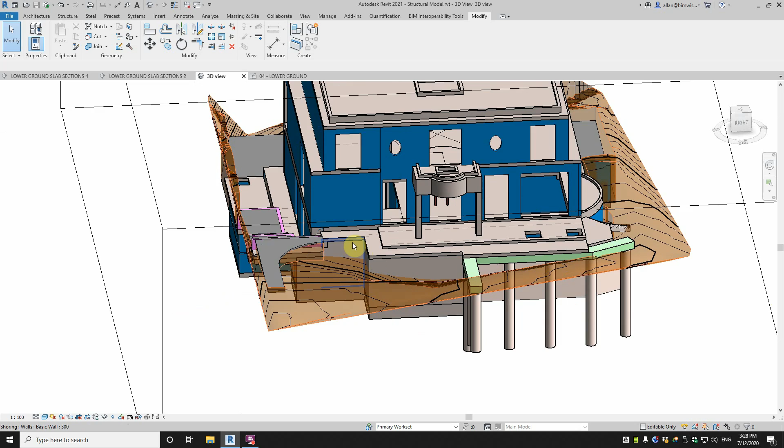We have this house model here in Revit, and it has these dirty, great big retaining walls at the front of the property. You can see there's some shoring closer to the boundary, but we have these great big concrete walls with big footings here to put the lower basement and the subfloor in, with underground parking in there with a lift, a car lift.

So how can we detail those retaining walls? Let's switch over to the lower ground floor plan, which shows the outline of the footing. You can see here that we have this great big thick concrete retaining wall, 300 thick, and a big footing. Then there's another slab sitting on top of that, which is the basement boundary, or the lower ground floor boundary.

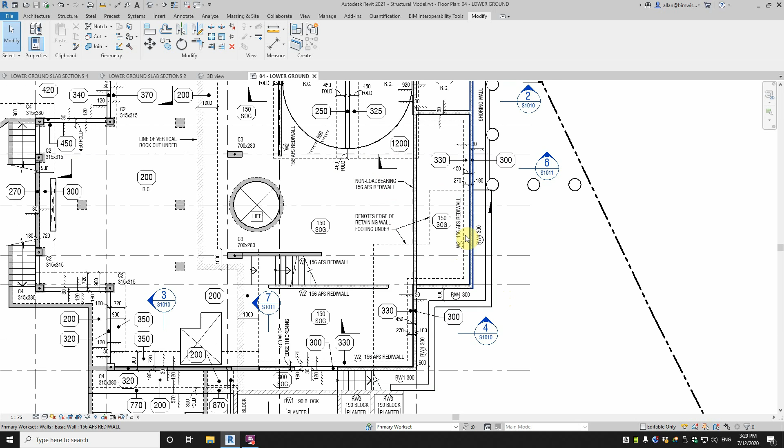And then the gap in between is a 600 wide zone, which is a plenum for mechanical ventilation of the air in the parking area, which is this zone here. It's a parking area, and that's a turntable for the cars to turn around and then go up a lift, and they can go out the ground floor on a lift.

So let's have a look at this. I've got this section here, so you cut a section, and typically something might look like that. It's modeled fairly accurately. You've got the footing, you've got the key of the footing there, you've got the concrete retaining wall.

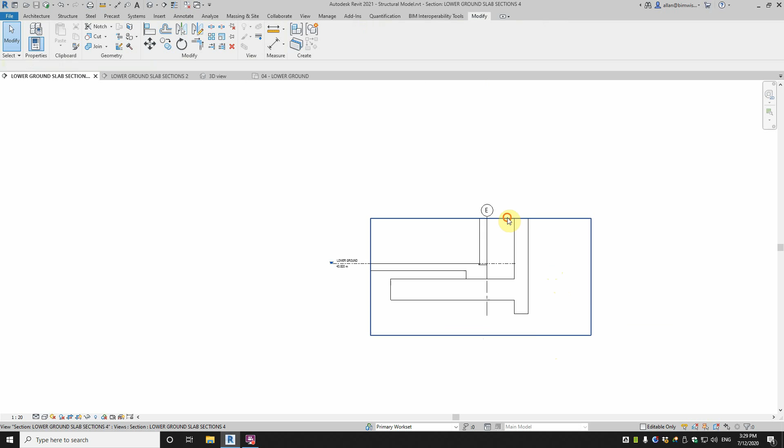If I pull it up a bit and see the next level, you can see that this wall here is actually a 156 AFS Rediwall, which is a plastic wall basically, but you pour concrete inside it with some reinforcing. Let's just switch that over to shaded.

You can see things clearer like that. You can see, well, there's the plenum, there's the lower ground, and there's a slab on top of that, so there'll be some grade placed over that footing.

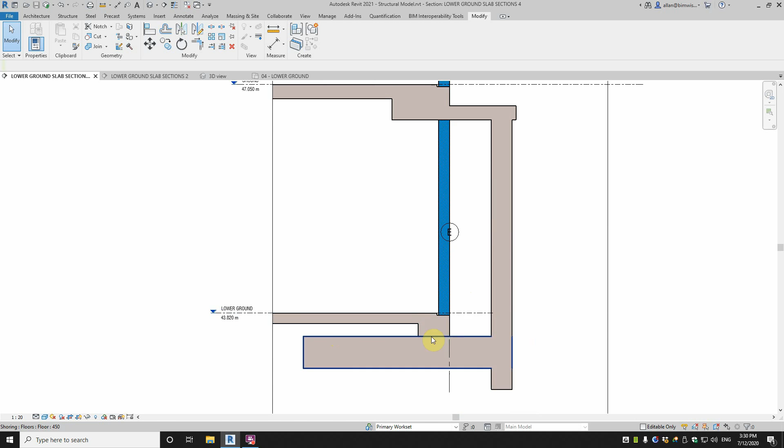So let's detail up the base of this. Let's pull it back to how I was going to detail it on this sheet, which is just on the bottom part. First of all, we'll probably do some dimensions. Dimensions make things more sensible.

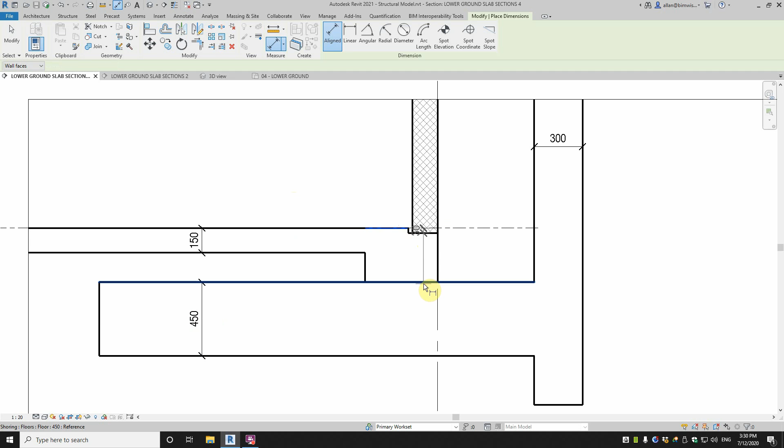300 there, 150 there, 450 there, we'll dimension this up. You can grab that little dot there, and you see how you can pull it out like that. By default it's got that little arc, which is okay, but you could tick the leader off and just have it in like that. And that's okay too. You can also grab dimensions and pull that line if you want it a bit closer. Dimensioning's okay in Revit.

I much prefer AutoCAD. I think there's more control for the draftsperson in there, you can just be more accurate with your dimensioning and your snaps. So we'll line those up. We'll give an overall one here too, and an overall one there.

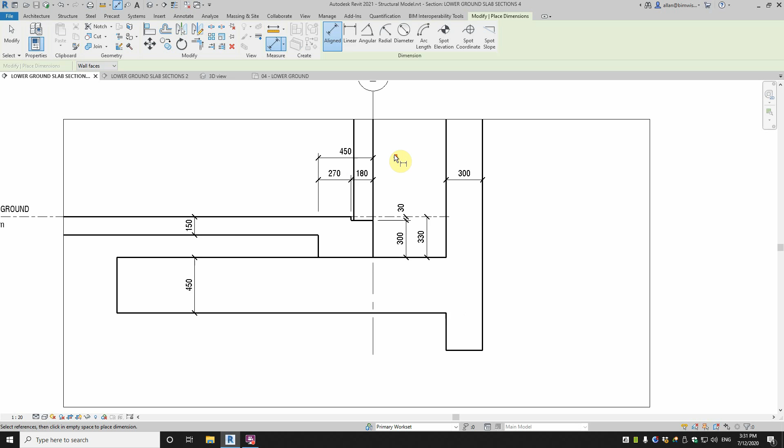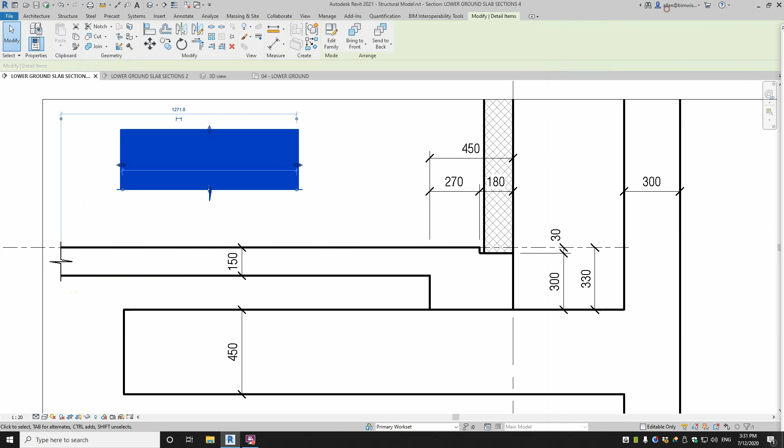Now the other one I want is break lines. So I have a family that I've created down in families, detail families, called detail break line 1 to 20, which is my scale 1 to 20. It's just basically 2 lines, so you click and you click, and it has the line work in the middle at the end of a break line, and it has a masking region there.

Now you can turn that off and on. There's a few things you can turn off and on there, like turn off the masking region. For example, if I turn it off on this one, blank area off, you can see the line work is still there. If I turn it back on, that line work's gone.

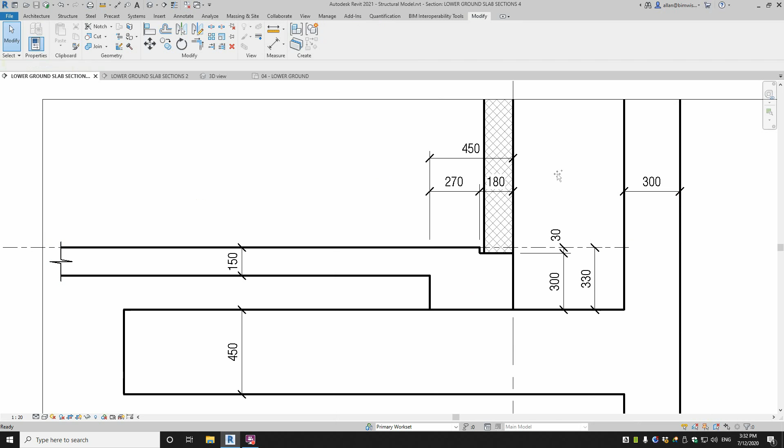So let's just break lines across all of these. We're only going to detail up to there. Also need dimensions, just that. I always use the align dimension.

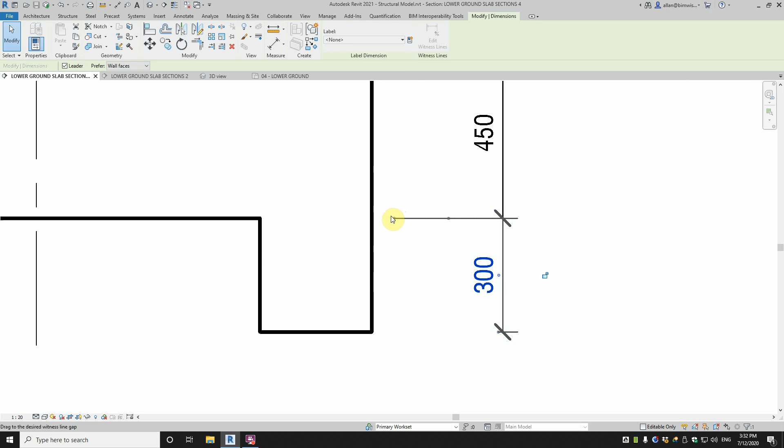See that? The depth of that footing would be better out there. This is what I don't particularly like with the Revit dimensions - it's can't really get it accurate. It's a lot of eyeballing stuff in some areas, which I don't like, particularly as I'm an old school drafter, and we just did everything precision.

300, that little key there, 450 thick. We will give an overall dimension - that's a good thing to have. Quite a decent size footing - so 3 meters by 300 millimeters, or 3 meters by 450 millimeters deep. So it's a decent retaining wall, over 3 meters high.

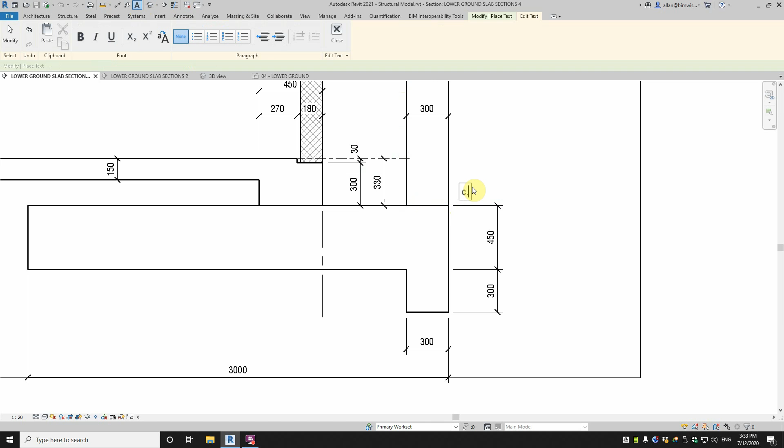I think that works pretty well with Revit. So let's put a tag on that with a bit of text now - CJ, as construction joint, so they know there's a construction joint there.

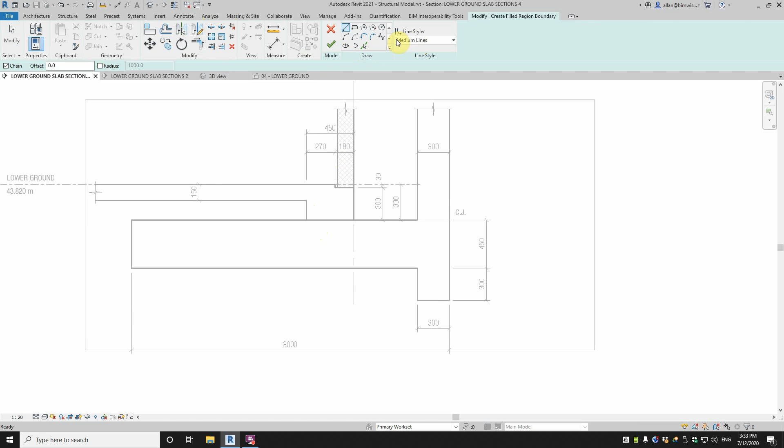Now we want some hatches around there. This is on grade, so there won't be a vertical cut there, but I just want one hidden line shown on the plan. I'm not going to model that slopey bit, but that's more likely. We use the annotate command and region. I'll show you a cool trick here. If I use the medium lines, which is the slab outline, I just draw a line straight up, 45 degrees, and whiz it around like this.

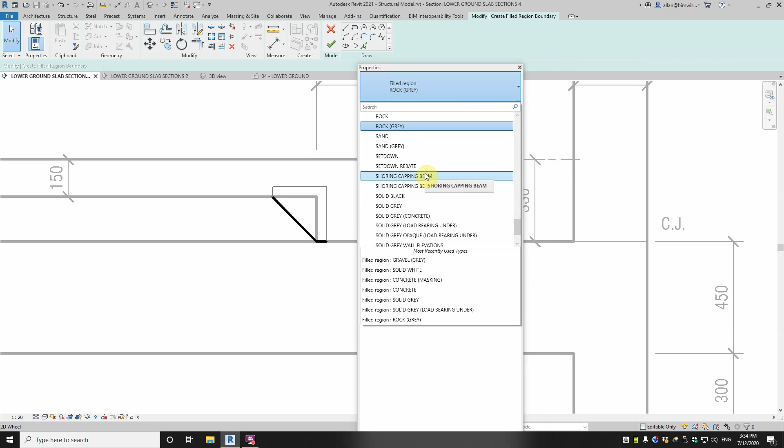Now here's the cunning bit. We make those three lines invisible, and set my fill profile to solid white, which is one I've set previously. If I edit that type, you can see the foreground pattern is white, it's solid, and it's no masking - oh, it is masking, sorry, masking's on. So we'll go okay on that, and it makes that shape there.

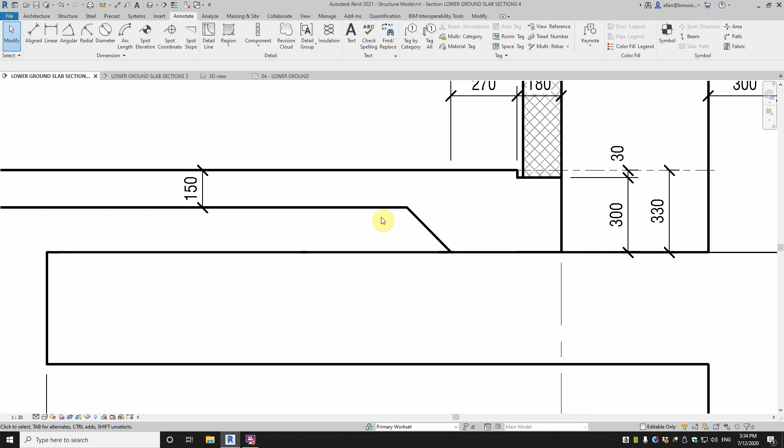That's more likely how the concrete's going to be poured, because the grade put on top of this, the gravel, will just taper off here to that minimum width of 450.

Now let's put the rest of the grade in. Like I said, there'll probably be grade there, and a membrane. So we'll go to hidden lines, and I'll just click there, and click that, and off there's fine. So I'll trim all that up now into a box.

Now I'll make those two invisible, and then I shall trim that, using that fillet command there, and I'll offset that 15 millimeters, but tick the copy off. Those hidden lines are going to represent the waterproof membrane, or the plastic that goes under the concrete slab there. And then underneath that, there'll be some compacted gravel.

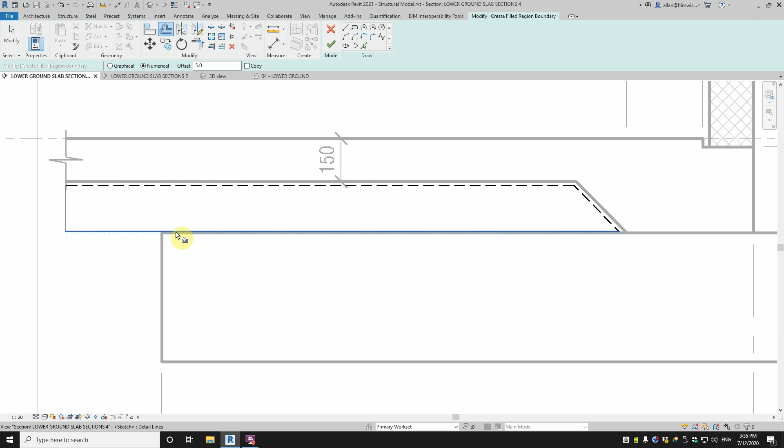Now I'm just going to offset this 5 mils because I don't want that invisible line right on there, but you're not going to see it. And then what I will use is one of my preset gravel ones. Where do I get my hatches from? How do I get those? Well, I get them from AutoCAD, the PAT file. You can import AutoCAD hatches, and then they stay in your model forever.

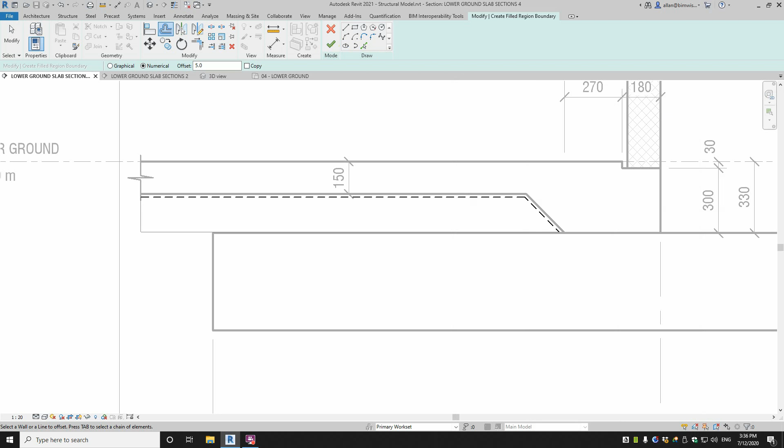So that one's good, I'll just look at that gravel - that was gravel grey, I'll just look at gravel dense. Oh, that's way too dense. So these patterns came straight from AutoCAD into Revit.

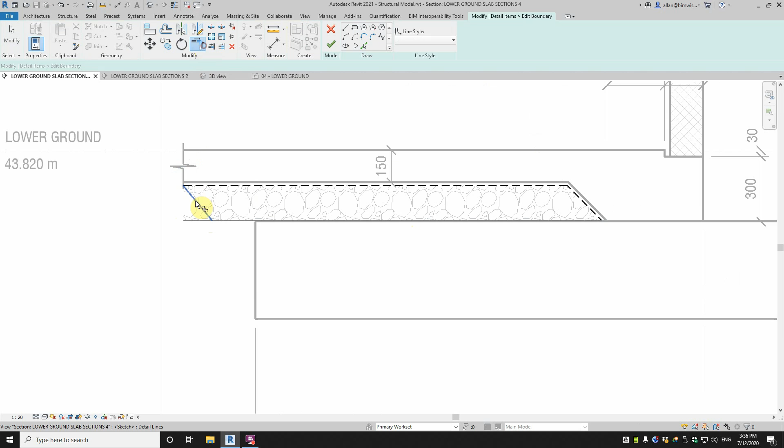That looks pretty good. I might just taper that, give it a bit more funky style - it's a bit diagrammatic anyway. It's probably maybe more like that actually. Might represent it like that.

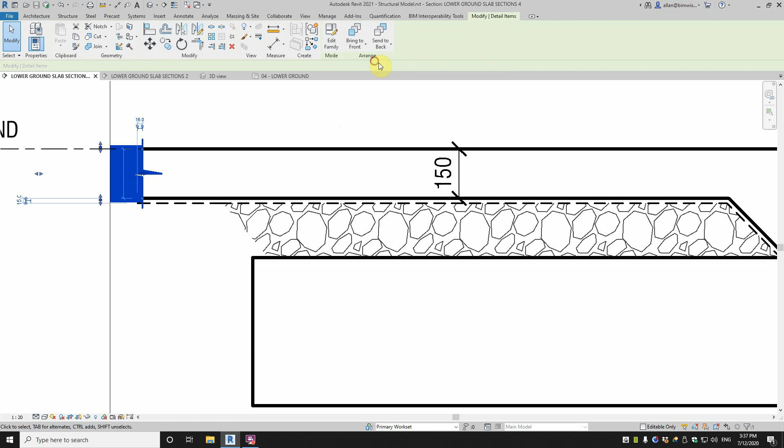If you ever get this situation where you've drawn a line like that and you want to have it masked, just click on that and then the object, and you know there's masking there, and come to this thing here and say bring to front. And that didn't work - bring to front. Maybe I'll just do this one and go send to back. Why isn't that working? Oh, you see why?

The masking isn't quite covering. And I can grab that there and pull it down, and the masking covers it now, but it didn't change the line work. So that's a way of doing that.

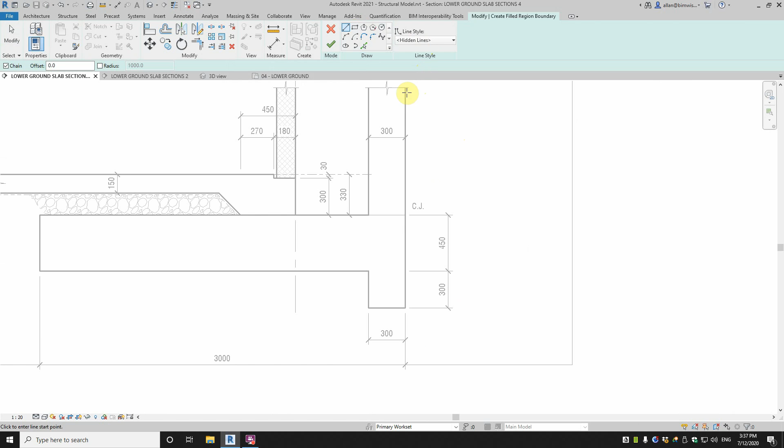Now we will have a membrane down this side too that the architect will specify. So let's do a similar thing here, but this project's in rock, sandstone, really high strength rock, probably 3000 kPa. So it'll be a vertical cut here. A lot of this will probably be just taking hydrostatic pressure more than actual soil loading.

Let's just offset this 15. Oops, I don't like how that works in Revit. This happens a lot. It seems to get stuck there.

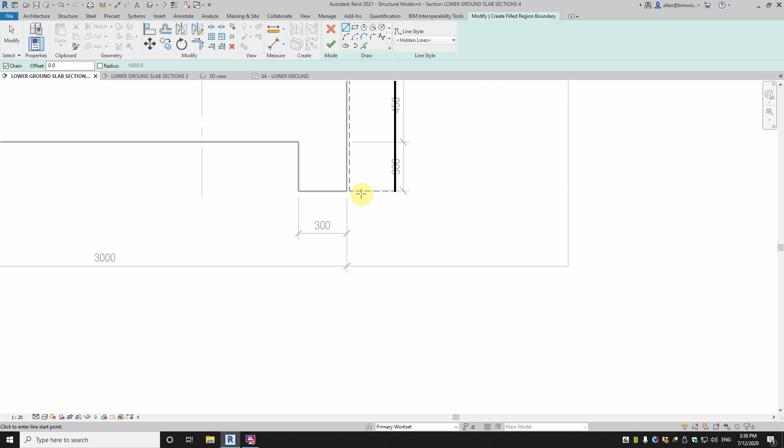Now we'll do a 300 wide gravel, and we'll have a vertical cut up there. Now that line's going to be fairly thick, I'll probably use wide lines on that, make it a bold one because that's the rock cut. And now I'll just put that across, so these bottom two will be invisible lines, and finish on that. And that's the gravel, that's good.

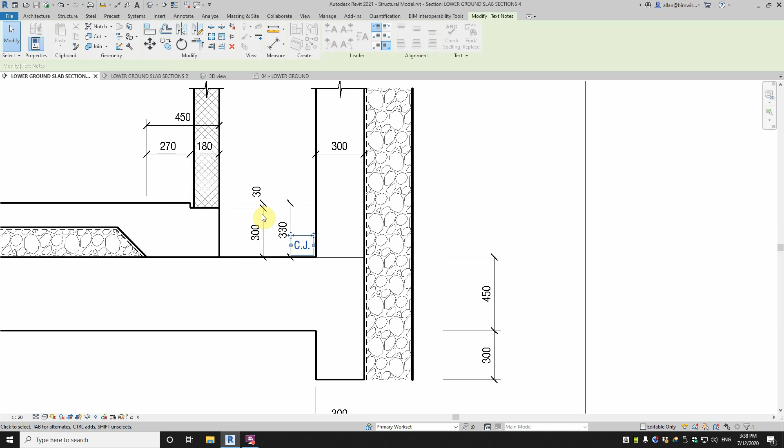You can see that's not super great, so I'm going to pull that dimension out, make it a bit clearer, and probably pull that CJ into there, that text like that. Now we'll have an ag drain down the bottom here - actually, we will make that.

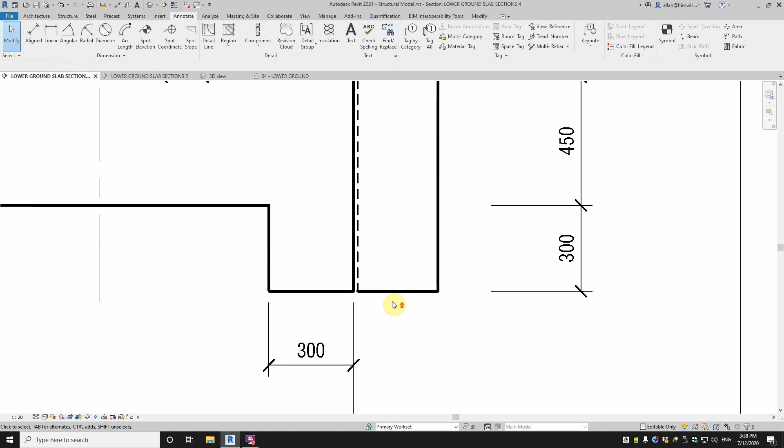I think I'm going to change that to medium lines. Actually, it's getting a bit busy there. So medium lines, tick. Probably should have just drawn a line there. That one's going to be straight across. We'll come back to that. So that's gravel. That's great.

Now we've got an ag drain down the bottom here. The way you can do that is, once again, a filled region with a circle, click the midpoint there, and use 100, so it's a 50mm radius. Make that fairly thick but not too thick, maybe lines, which is my 0.35 pen, and change that to solid white.

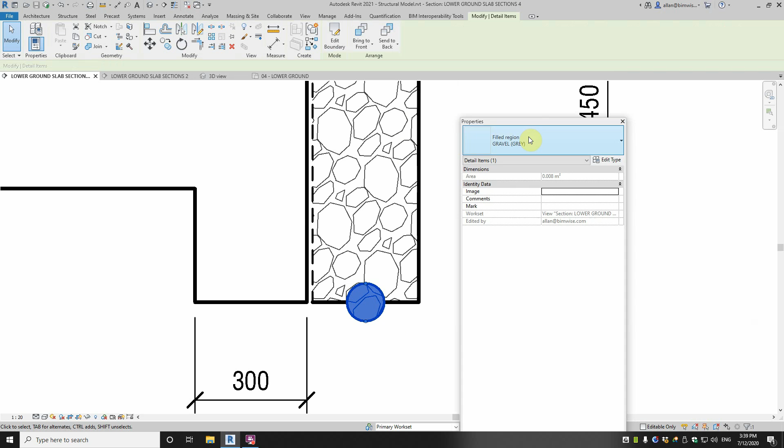And because it's sitting on top, it'll block it out. Now I also like to always show the geofabric around my ag drain, because I like to put them in geofabric socks as well for the civil stuff. So just move that up a bit more probably.

And so we'll draw another circle. DL I typed in then, which was the shortcut for getting to the place detail lines. So we go to the hidden lines, just typed in SC for center, and then pull that out. Now we just want that a bit past it, so 55, that's not enough. 60, that looks like enough white space. So there's my ag drain.

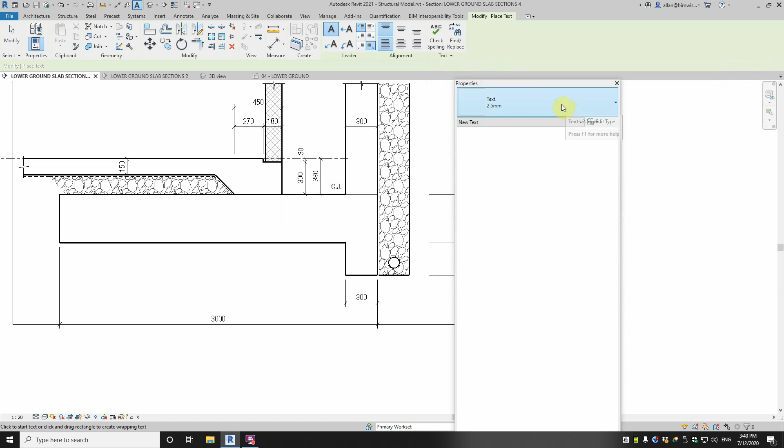I can actually put a piece of text on there. If I go to text, the text button just there, I have preset already, I'm doing 2.5mm high text. And if we look at it, I'm using Swiss 721 Cn BT, which is a great drafting true type font. It's nice and narrow, looks traditional sort of drafting style, but funky as well. So let's go there. I've got A1 title sheet, so I always say do 2.5mm text for A1 plus size. If you're A3 or below, use 2mm text.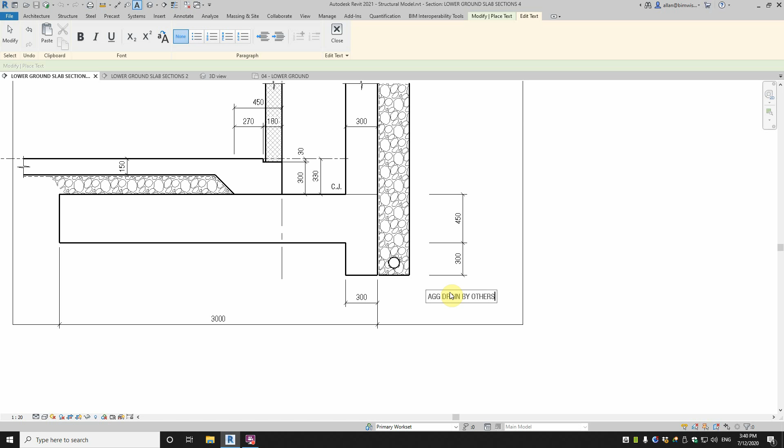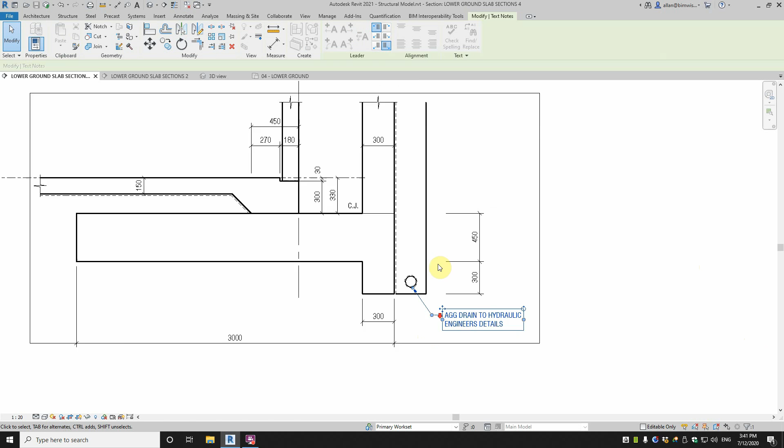So we're going to say here, ag drain by others. Hydraulic engineer will probably be doing the design of that. In fact, I should probably put that ag drain to hydraulic engineers details. But that's important structurally too, because it takes the hydrostatic pressure off the wall as the water can get away and doesn't build up for too long.

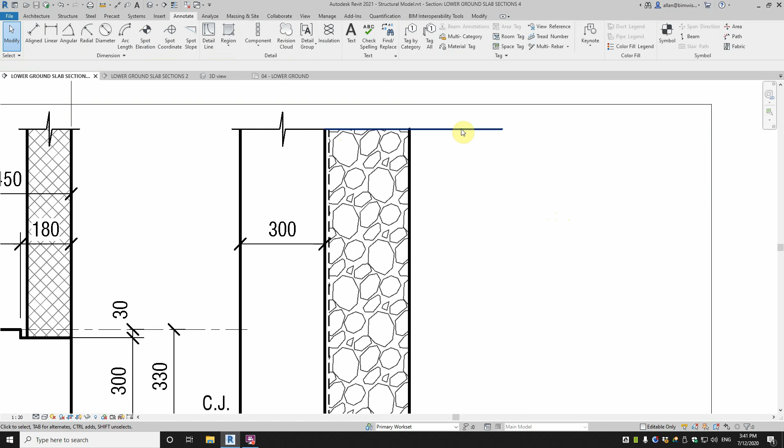Now this one, yeah, I'd rather just keep the break there, so I'm just going to continue a line. I would like that broken further, so just put that as a thin line. Thin lines, thin lines, thin lines, thin lines. That's done. That one. Yep. See, that moves seamlessly through that.

Now, were we going to show some rock here with the rock hatch? So once again, region. I'm going to go rock, rockety, rock, and probably just cut it there somewhere. And we'll drive it around like this. I'll keep consistent with the distance off from each other, and so as it wraps around here, it looks good, drafting style. So let's just trim up our object that we're having as our boundary with the trim command.

Now one thing I'm going to do now is click on the line that I want to move, and then grab this dimension here, this little dot, and pull it to where I want it to offset from, and make that 250. Now if I go to this one and do a similar thing, pull it down to there, and make it 250. Now it's even around. I'm going to pull those dimensions out. Maybe I'll make it 200. Probably still look all right.

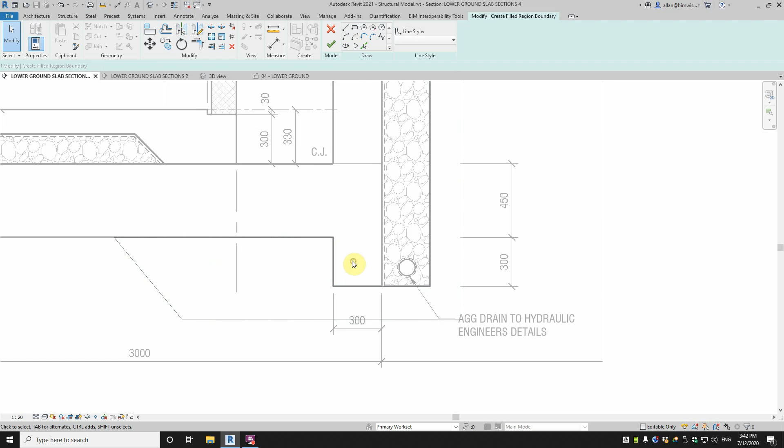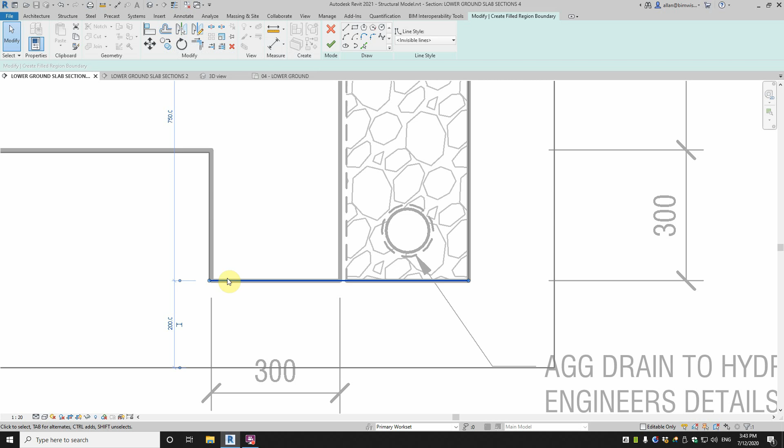Now the other thing I want to do is make all of this invisible lines. I'm going to offset this one by 5mm, so it's not sitting right on there. Sometimes when you've got invisible lines stacked on objects, it can sort of block out that line - whoa, I'm going the opposite way. You don't want that to really happen. I should have, I'll just offset this by 5, to offset by 5.

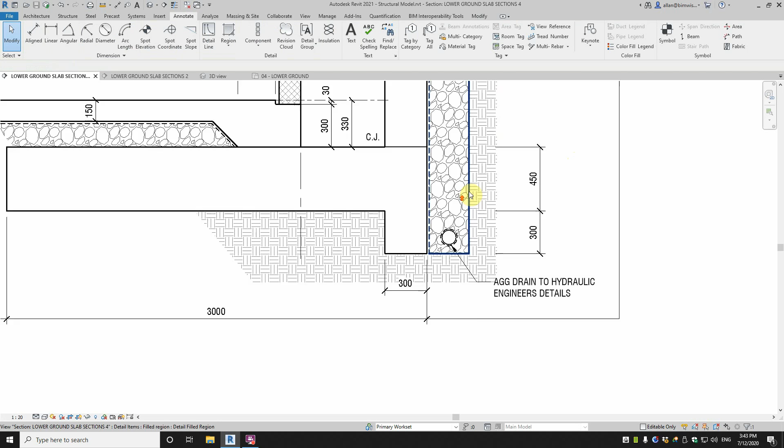And then I'll use my one that I've already done, my Rock Hatch Grey, which I imported from AutoCAD years ago and still works. That's the Rock Hatch, which is the 45 degree straight line, dash line, straight line. That represents rock whenever you see that. As opposed to the Earth one, which looks like that - that's undisturbed Earth, that hatch. When it's at 45 degrees, it's compacted Earth. So let's put that back to rock, grey.

Yeah, I should have done that a different way, but I've got that little line there to fill up, which is a bit dumb. I could have done that in a cleverer way, but that's done. So there's our rock cuts. They excavate this, they put the wall on the gravel, some sort of membrane probably put down here to protect the gravel, protect the wall a bit more from hydrostatic.

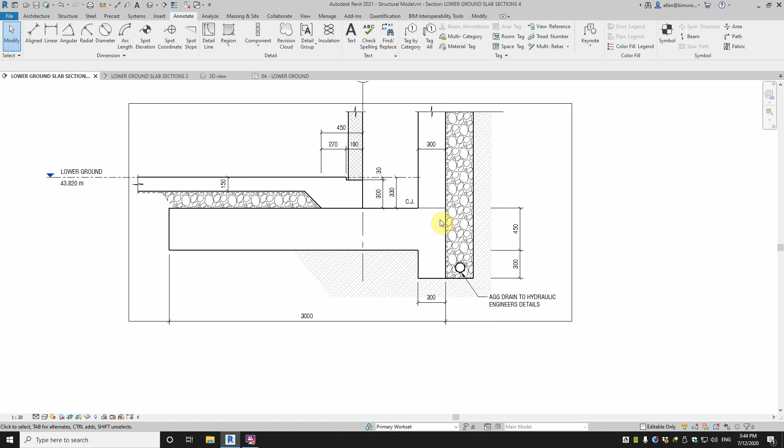Got our construction joint. Now we've got some reinforcing we want to put in, so it's going to be 2 layers of reinforcing coming straight up the wall there.

Now, because it's built from the outside in, you don't have access to both sides because of the gravel here. You probably will see something a bit different here with the way you normally construct walls.

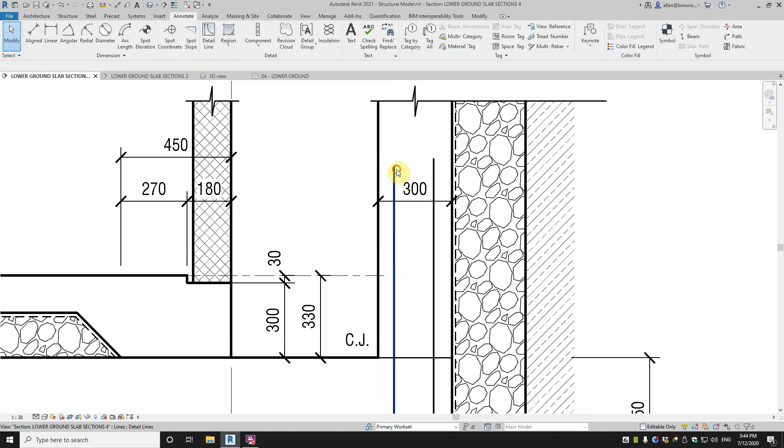So I'll put that on lines, which is my 0.35 pen. I often see this wall, and it depends on your structural engineering here - if it's a cantilevered retaining wall and you haven't backfilled, it's a different load combination. But if it's a pinned at top retaining wall and they don't backfill until the top slab reaches full strength, the loading, tension and compression is all different. So I'm going to assume they'll backfill it before they pour the top slab because of construction access issues. So that will be driving a lot of what I do here.

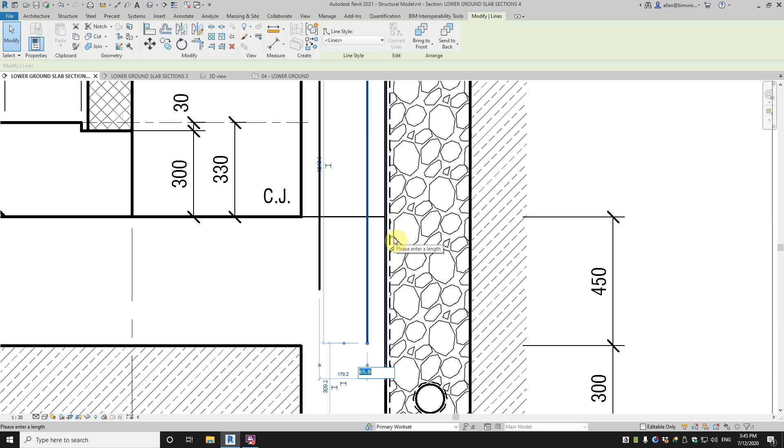So it'll be a 55 millimeter cover or something like that, maybe even 75. I'll just draw it at 65 diagrammatically because that is the center line. Now this one's going to be a bit different though, and you'll see that in a second. So that one I'm going to do as 80.

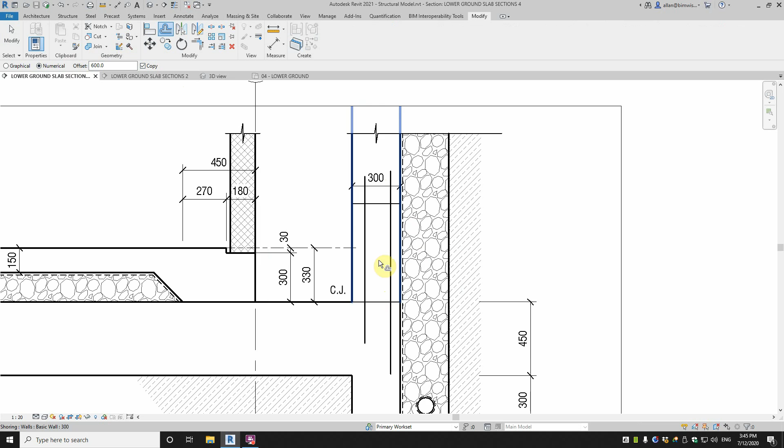Now this, first of all, we need the starter bar. I'm going to use N16s at 150 centers, so a fair few. Diagrammatically, I'm going to show that as a 600 lap, offset that construction line - leave the copy on so you can offset and keep the original. Now I'm going to offset 15 millimeters, this line, and this line. That will represent my starter bars.

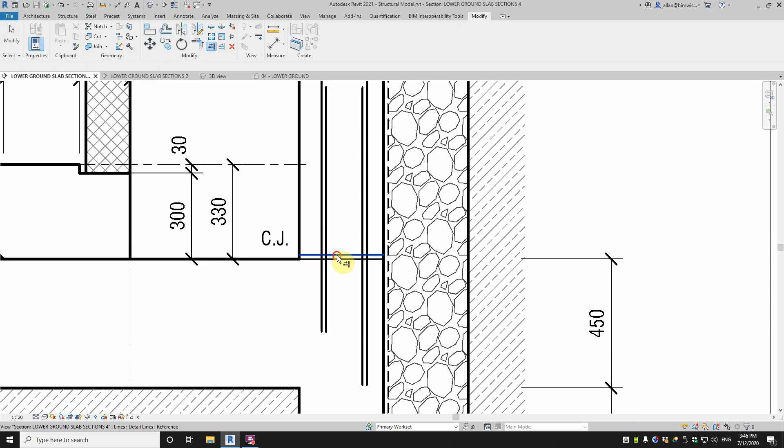So trim to that, trim to that. Well, I'll offset this 15 - 15 is good to use for concrete detailing. If you're consistent, it'll just look good as good drafting if you're consistent there. So let's bang that up there - there's my starter bar.

Whoa, I trimmed the... Oh no, that's right, I've trimmed the wrong ones here. So let's grab the ends of those and pull it up until it snaps to that end of that line. Lines up with it. And then grab that one, pull it up until it snaps to that. So that's right. Now these ones have to come down.

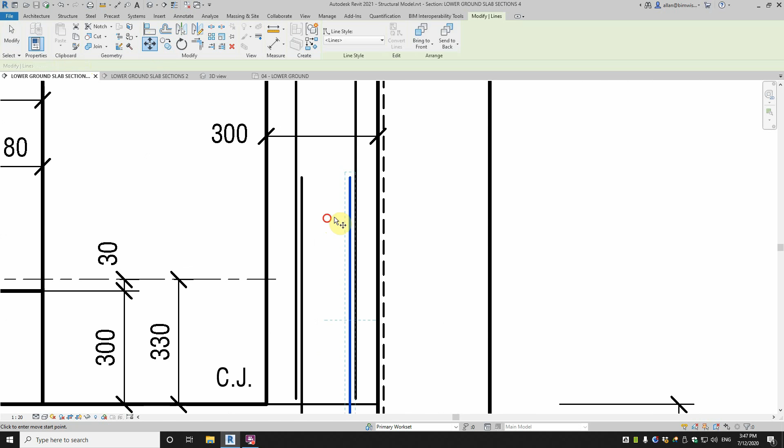Now we've got that. I'm going to pull that out there, tick that leader off because it's getting busy there. Now we've got the bars that are going, the horizontal bars. I'm going to change that to 30 and move that over by 5. This will become apparent in a minute.

So my thinking here is that this vertical bar goes in, and then the horizontal bars are put from the outside in, from this direction in. And likewise for the outside bar, they put it vertical up and then that direction in. So the horizontal bars are on the inside here and the inside here, instead of that side and that side, which is typical for just plain block retaining walls because you access it from both sides.

So let's go to annotate and component, repeating detail component. Now I've got a bunch preset in here, but if I go down to N16, I already have it - N16 at 150. What it's set up to is I've got a family, N16 bars and 20 bars, all the bars in there, and I have maximum spacing at 150. So you click 2 points and it'll fill it out automatically at maximum 150 centers. So just grab down there, grab up there, and it's done.

But then we just move it over 15. And there's your N16 bars at 150. Now that's pretty heavy - I'm thinking actually it should be N12s for the horizontal, N16's for the verticals.

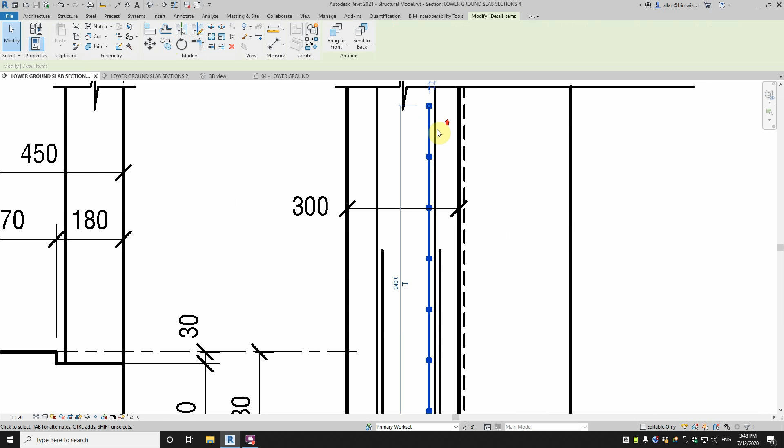So I'll just change that to N12 bars. If you look off here off the screen, I've got one preset, N12 at 150. So once you've got a bunch of stuff set up in your model, you are a lot quicker. Now I can go here and have that as lines permanently, so it's quicker.

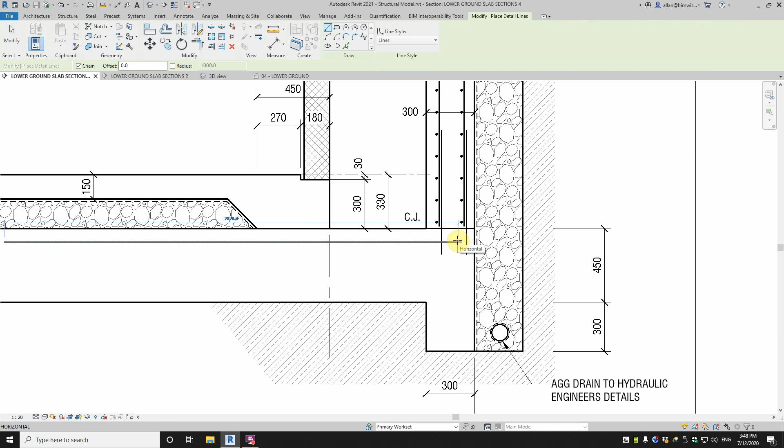Now let's draw the reinforcing for the footing - I mean top reinforcing only, an L bar here. Let's get the cover on it reasonably right - let's go for the 65, and the 65. Why can't I? Is that already on there? That looks good enough.

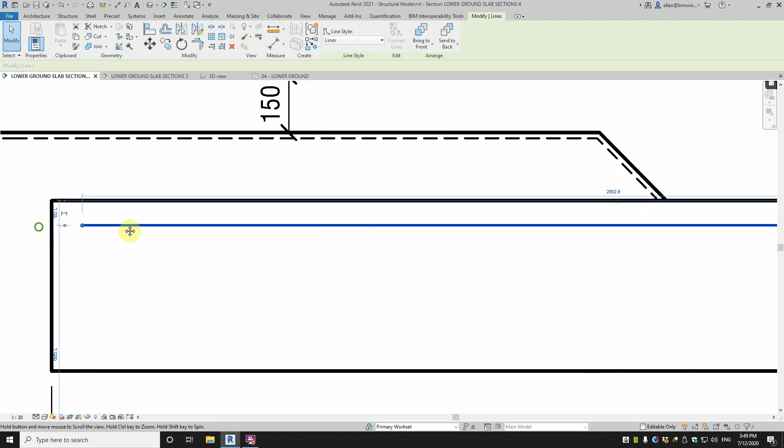You could probably fiddle around with that if you really wanted to set it right. Get the cover - I think with structural drafting, it's just good that you clearly show that there is a decent cover, but you actually would follow the code on how you do the actual cover and on the general notes.

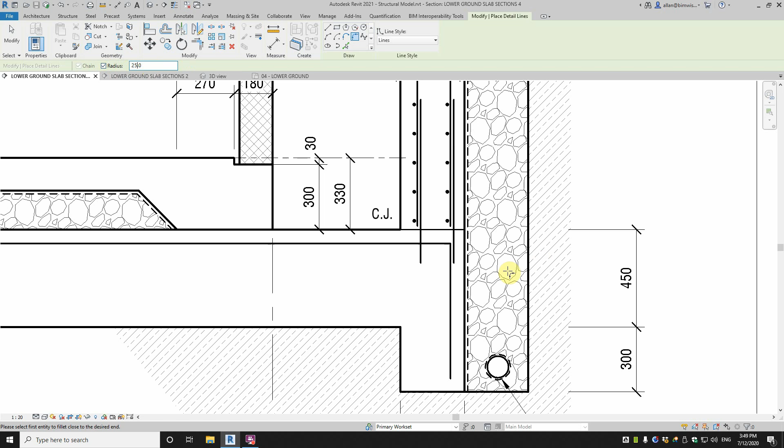So that needs a fillet radius because bars don't just go a hard return like that. So once again, DL, go up here to this one, which is the fillet arc. Go to radius here and click on 25. I've been favoring that a lot lately. I did do 30 for years, but I'm onto that one now.

Our horizontal bars will be a bit bigger here. All of these will be N16s, both of them, but the horizontal bars in the top here, which are basically just to tie this L bar to, will be N16s, but at 400 centers.

Now I don't have an N16 at 400 preset, but what I can do is N16 at 300. I go edit type, duplicate, and I'll change that to 400. When you've got the little 2 at the end, it's just a preset change that Revit does automatically. So N16's at 400, done, done, done, and done.

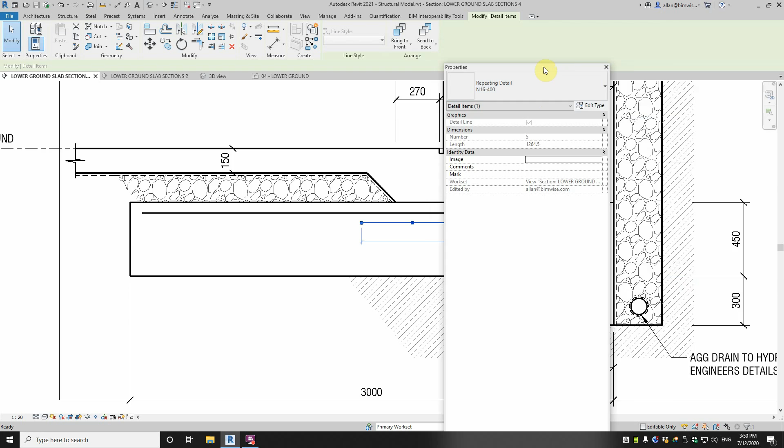And then I'll just pull that up to my line, move it off 15 mils. 15 mils seems to work quite well for 16 and 12 bars. 20's at a pinch, it does okay.

So that's our bars. Now we will have one down here and we will have one down here as well. But I'll draw that after I draw the starter bars here because they'll cog into the slab.

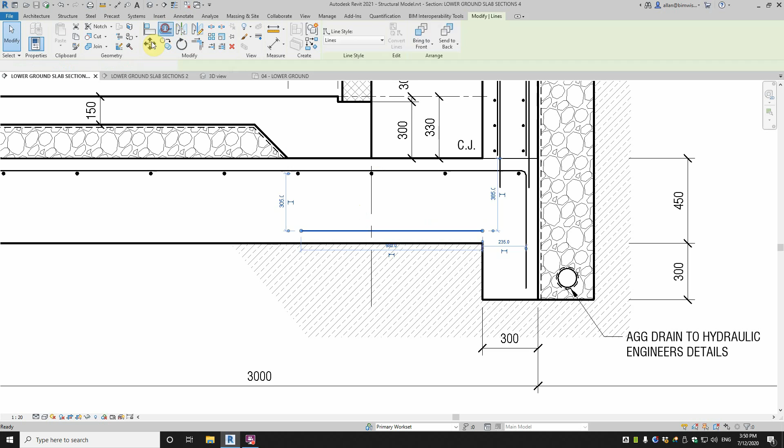So let's move that up 65 and offset that 15. Then use the fillet command, the DL, the fillet, the radius is 25, that one, and then - whoops, don't want to lock that to that - and that one. I removed constraint there, I don't know how I did that.

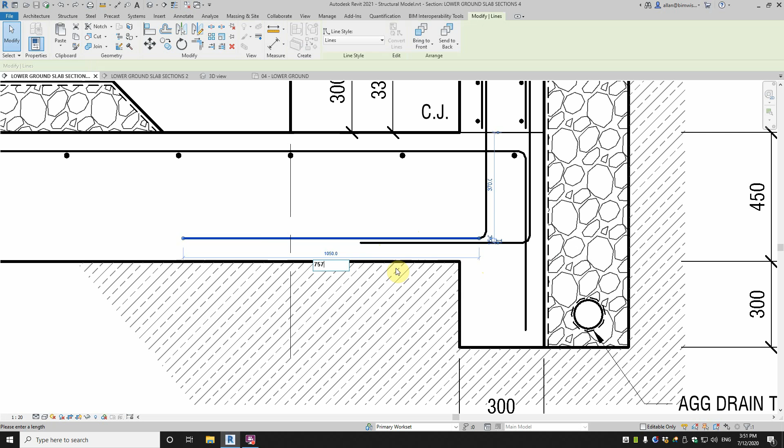375, that's 400 cog - no, that doesn't look right. I'm going to 600 cog, so we'll go 575 plus the radius is 600. 575. If you ever make a mistake like that, Control Z just does an undo real quick. 575, ooh, 575. Now we'll have a bar here, and a bar here.

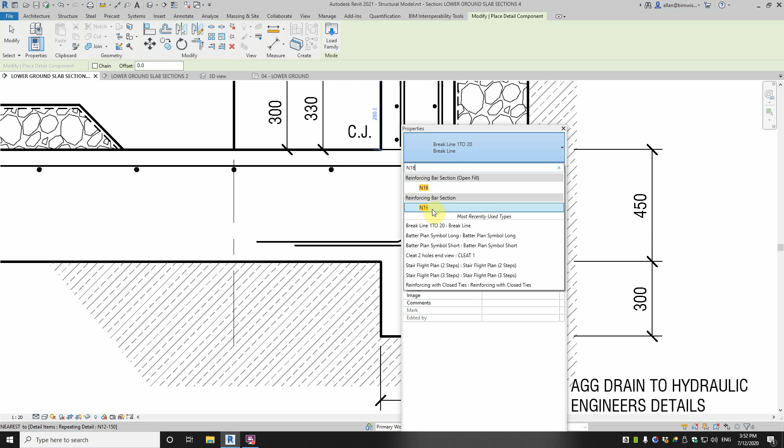So that's just a single bar. So if I go to annotate component, detail component, and if I just go to this and see how it's got that little search there - it's pretty hard to see, but N16. Now which one is it? I've got open fill, which is just a circle. I think it's this one, N16.

Yep, so I'll have a bar down there, I'll have one there, and I'll have one there, and I'll have one there. That's basically just to tie the reinforcing to something so it keeps it neat. So there we've got it. Basically, I think that's done.

Let's just check that. Now I've just got to put the annotation on there for the reinforcing. Pull that out from the hatch. Might just make that view out a bit so it's - I know it doesn't print out, but it messes with your head a bit.

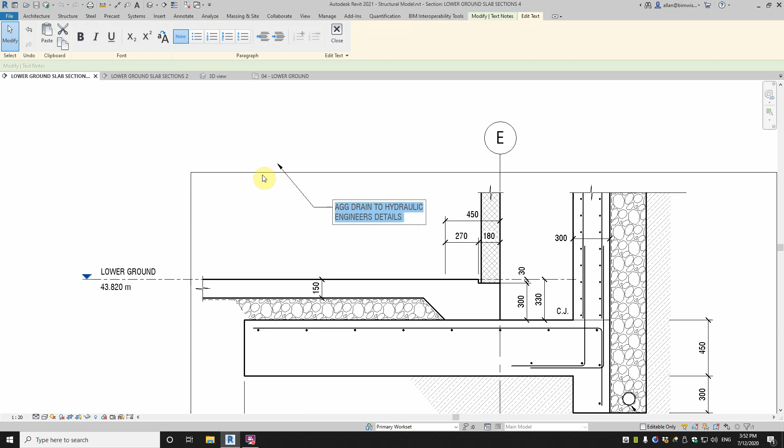Okay, so that's a Dincel wall. So I'll just put - no sorry, AFS Rediwall. Refer to schedule for details. Just keep that loose as a goose.

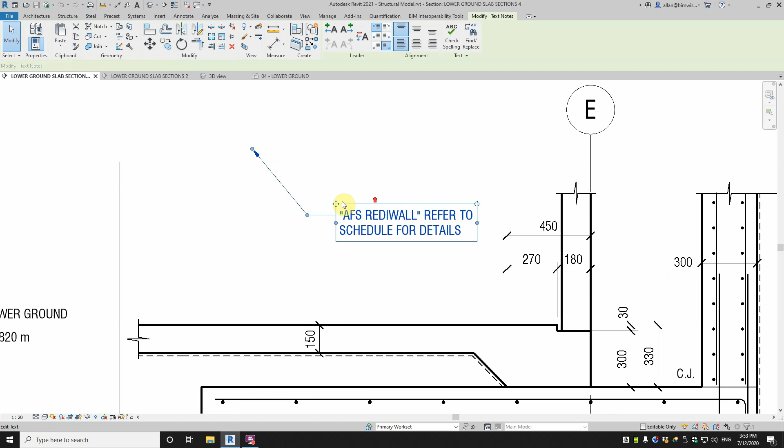And I always like to put - got a really weird thing with my keyboard here, I've got to do it twice for it to enter in, someone tell me what's going wrong there - but I always like to put quotes there around proprietary products, so it doesn't get mixed up with the word, as it's just a word.

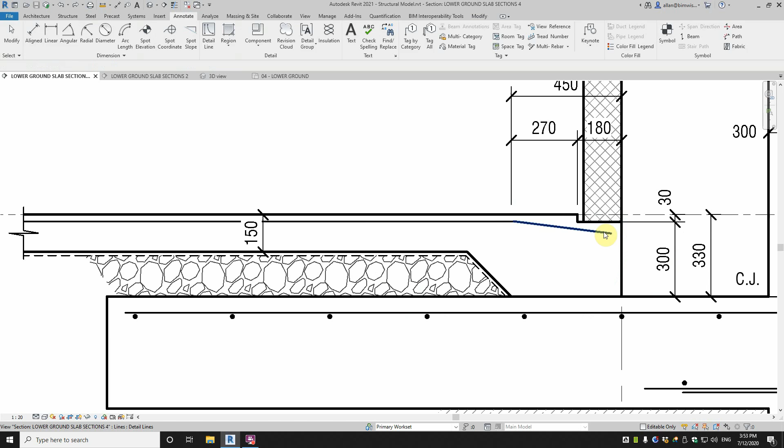Now we'll have mesh in here. Mesh is shown as a hidden line. So I'll just jive it to there, and then we'll probably cog it down like that, which is - because it's only 30mm step, you can do that, it's okay in the code. So I'm going to change that line to the hidden line, and that represents mesh.

Now that slab down there is a slab on grade, which has got a whole sheet of typical details. So we will just write on here: slab on ground, we'll call it. Slab on ground, refer to typical details on sheet S0901. I think that's the right one.

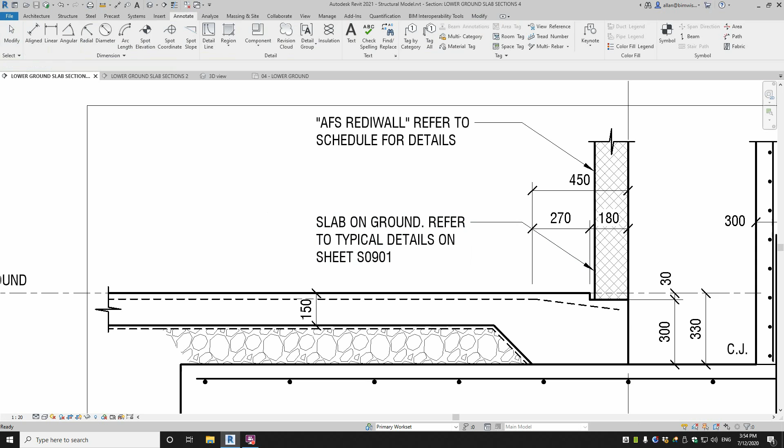Let me just have a look at the S0901 - it's off the screen, but oh, I don't have typical concrete details yet, so that's to be done, to do. I can copy that from another project.

It's always good to have always left align text. Never do right align text - I don't know why on earth people do that, it looks disgusting. Left align, keep things aligned. It's just good elements of style.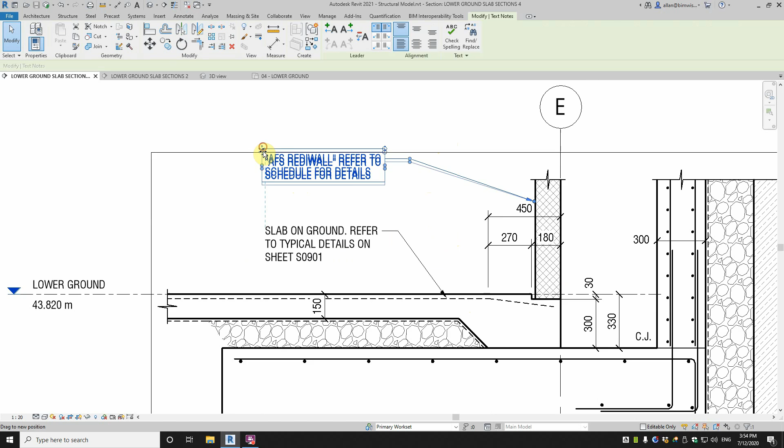So over here we're going to have it aligned straight up like that, and it's going to look a great looking detail. We'll pull that in a bit, pull that in a bit.

This is where we shall - well, we'll detail this one down here first. So we'll call this - I think we can do this as a single note. No, maybe not, maybe not, because they might get the wrong bars in the wrong direction.

So I'll put N16 at 200, and I'll put L in there, L bars, because that describes the shape, because it's L shaped. And then I'll copy that down, and I'll call this one N16 400 horizontal bars. I hate for them to mix that up, they get the 400s in the wrong direction. That would be a real disaster structurally.

N12, I've got one in here already called Circle Leader.

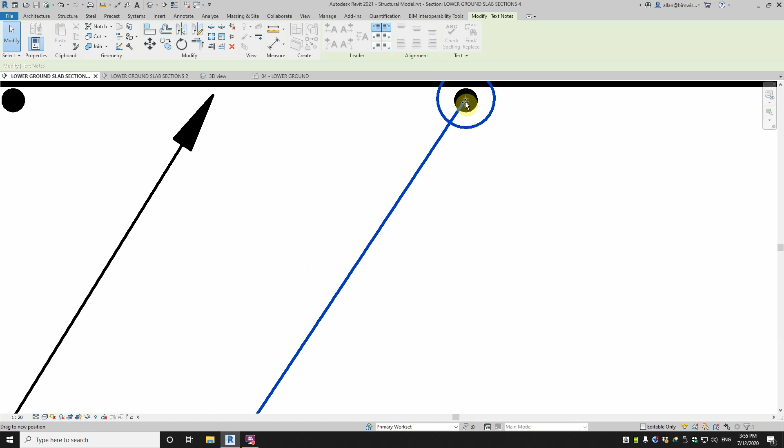2.5mm high text, so it's a circle leader, so you can just put it over the top of something like that, which is pretty cool. Always have those leaders at similar angles. It's harder to do in Revit, I know, but it's good style when you can do it. Sometimes you can't because it gets too busy, but if you get this sort of array thing happening, it makes good looking drawings.

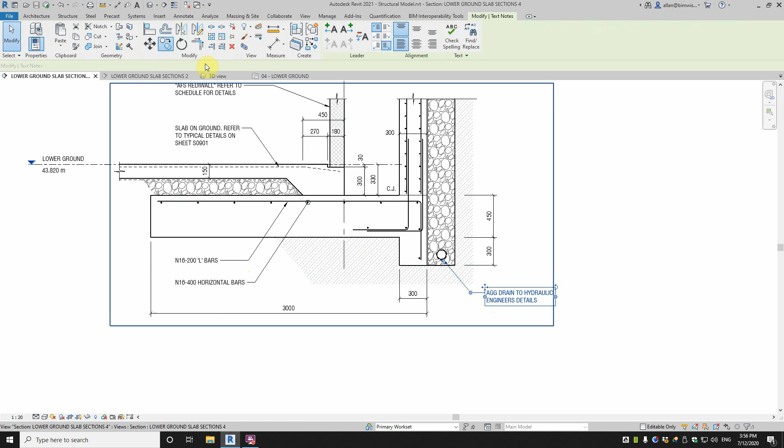We've also got some here. I'll just label those as N16 horizontal, as shown, for those distribution bars, I guess the tie bars.

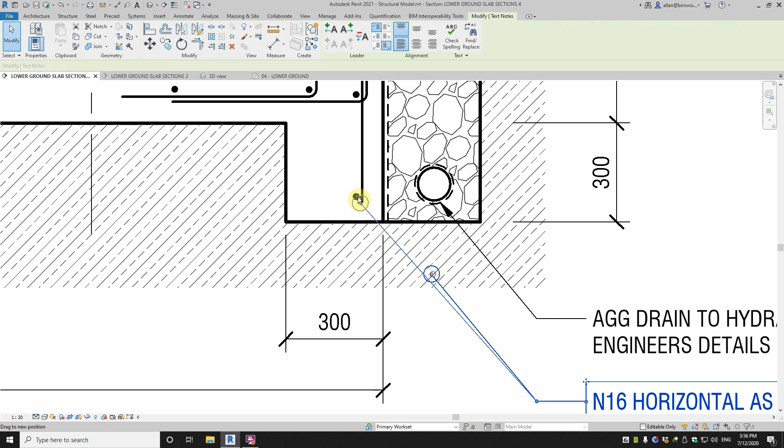Now there's another one I've got, dot, which is great when you want to put it on a surface. But I'll use that circle leader again. Plonk it in there. That looks razzmatazz.

We will need a dimension here. What's going on there? Oh, I'm not clicking on it. We need a dimension on this. I haven't quite got that right, but that's alright because we're going to override that.

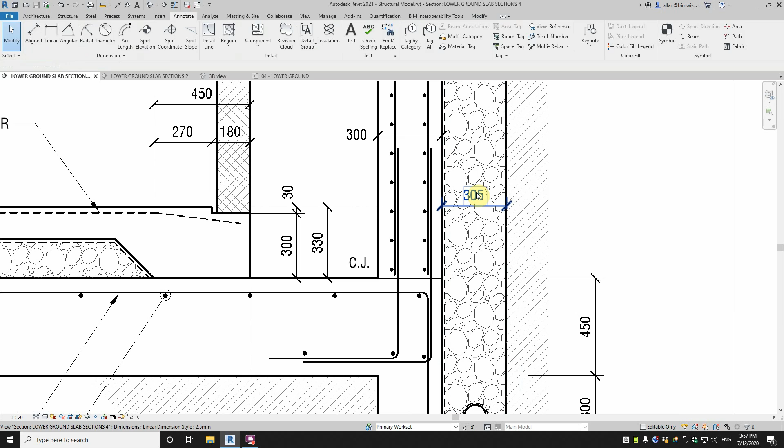Replace with 300mm wide free draining gravel. That might be too long. I'll just see how that comes out, and I might adjust that. Yeah, I might put that.

So I've got the top line there, 300mm wide free - spelt wrong - below the line here, draining gravel, free draining gravel, good, put that there. The text is opaque, so it will cover that, which is great. It's hard to see that because of the hatch, but that's okay.

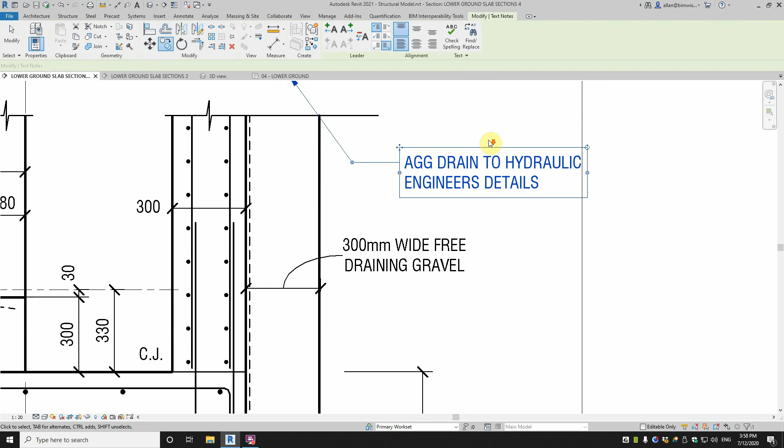Now we'll pull this, copy this text up, copy, let's just move it straight up. You can see that little line there, that means vertical. And we shall put a text here, which will be N16 at 150 vertical bars and starter bars, both sides.

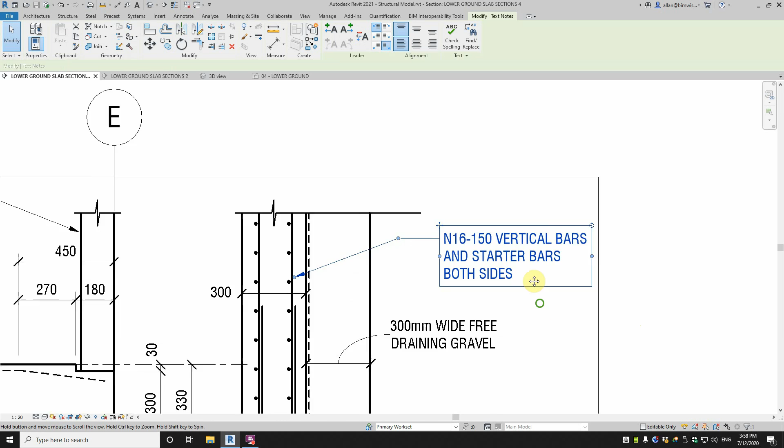Just thinking about style here. Might pull that up a bit, and then copy that one down. Once again, I'll keep the horizontal bars separate. You could put it in the same text, it'd still be okay. Oop, I'm just getting a bit of a jag there. Grab that, copy it down.

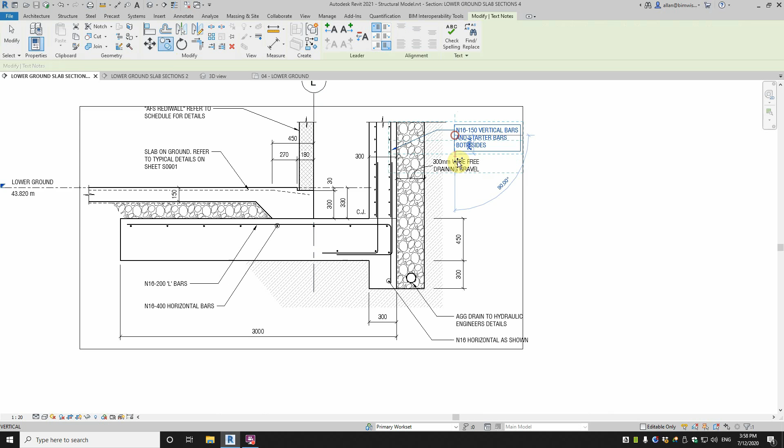I'm going to change that one to a 2.5mm circle leader again, because it's going to plonk straight over that horizontal bar. And this time it's N12s at 150 horizontal bars, both sides.

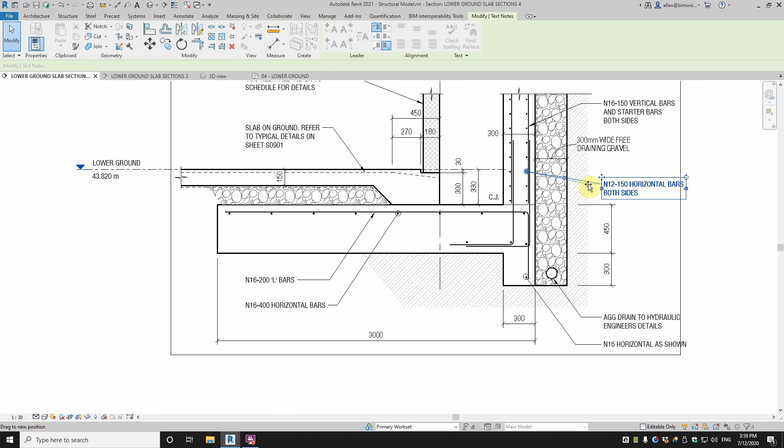That looks like a terrible leader. Let's try if we can make that look a bit better. Not particularly great, the dimensions are getting in the way, but it's not too bad.

Keep that dimension there. Okay, let's just have a quick review of that. I haven't got the maximum retaining wall height on there. I'll do that on another drawing.

This is, we've got the - you know what actually would be better? I pull that up there and pull that up there. If you keep objects out, dimensions and annotations out of the thing you're drawing, it does make it cleaner. It looks a lot better.

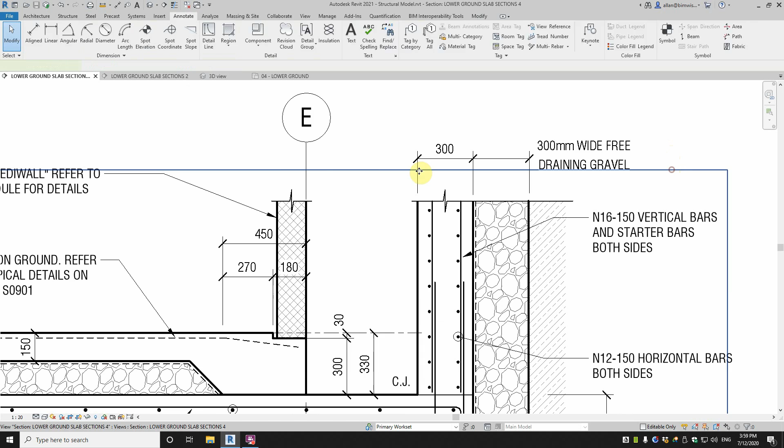Actually, I would rather that to be like this, and I draw a line off there. Ooh, it's there. If you can't see a line that you've drawn up there, it's because of this view area. You just need to pull it up a bit more. Now, what will happen is I'm seeing more of the wall, so I need to pull up my masking area a bit more.

Change that to thin lines, which is the same thickness as the dimension lines. I don't think that changed. Thin lines. Whoa, I got thick lines. I'm having a crazy moment here.

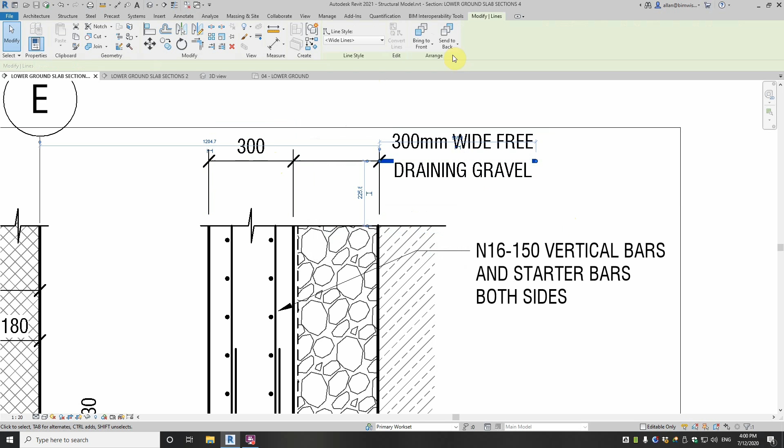And also I need to bring it to front. Bring to front. That's not working. Let's draw it again. I've done this before, so I know it works. Thin lines. Thin lines. Draw it across like that.

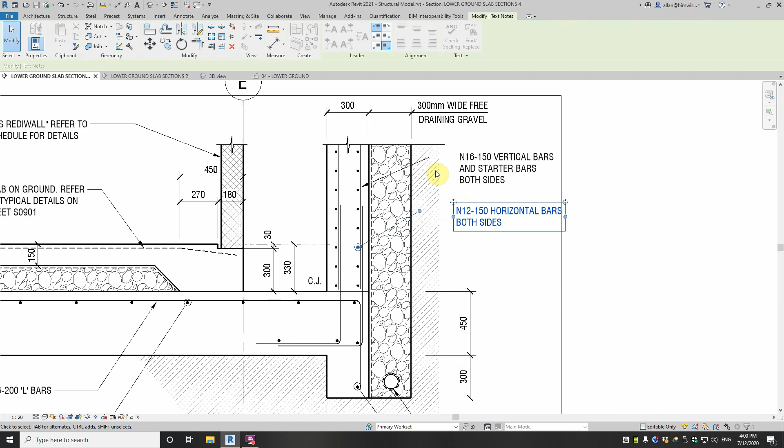And that 300mm wide free draining gravel, that looks heaps better. And then let's pull this dimension up like that so they come in at the same angle, so they've got consistency in what they're pointing at. And I'll make sure that one doesn't get mistaken for what it's pointing at.

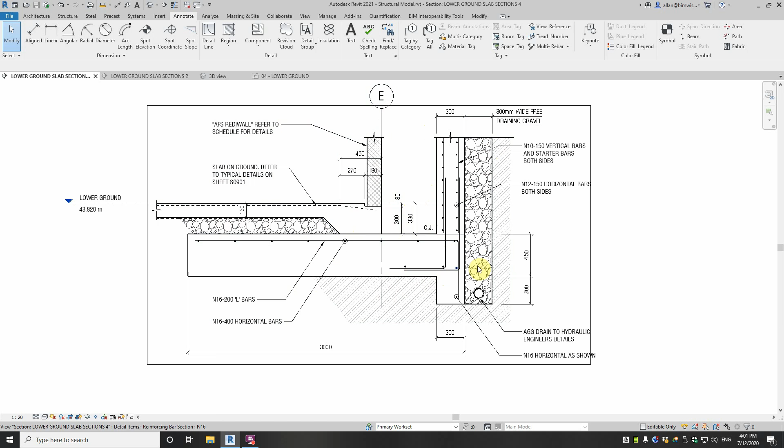But of course you're saying vertical and horizontal. So there we go. We've got detail, we've got the dimensions, we've got the reinforcing, the size of the reinforcing. That is covered elsewhere. We've got the overall dimensions, so you can have an idea about how to excavate it. You've got the ag drain. That's done. So that's how you can do a detail.